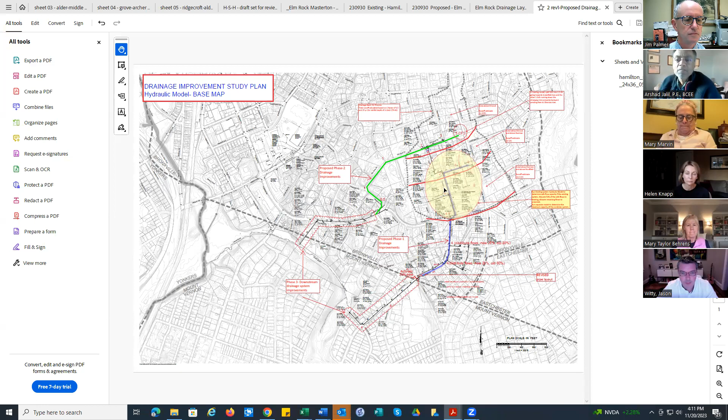This blue line kind of shows an improved conveyance system, a new catch basin, manhole, and storm pipe that we are proposing. This green line proposes another set of drainage pipe, as Jim indicated, improving the drainage system for the Elm Rock, and goes up and discharges it back into the Pondfield Road drainage system, which kind of goes back through Leggett Road or past Leggett Road into the brook right at this location.

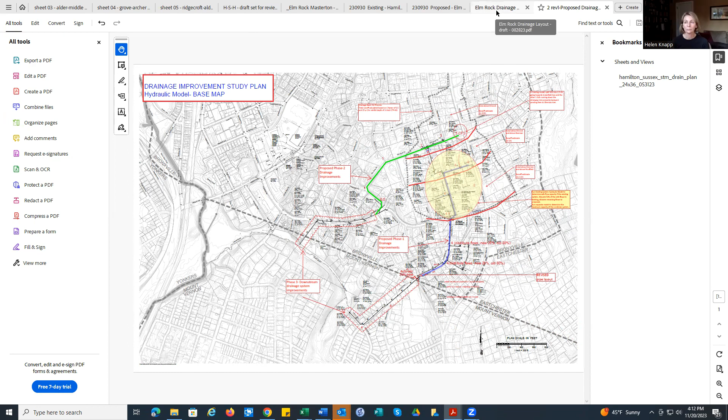There has been some hydraulic analysis. I'm just going to quickly recap what we had done in the past. This is the set of survey. We actually hired a surveyor to survey all these areas that you can look at. Later on, we actually hired a soil boring contractor to see the underground characteristics of the soil, the rock, the drainage, the water table, and all that. Just last week, we were able to get all that information. We have preliminary information, which is good enough for us to complete our projects to that 95% completion, as I said.

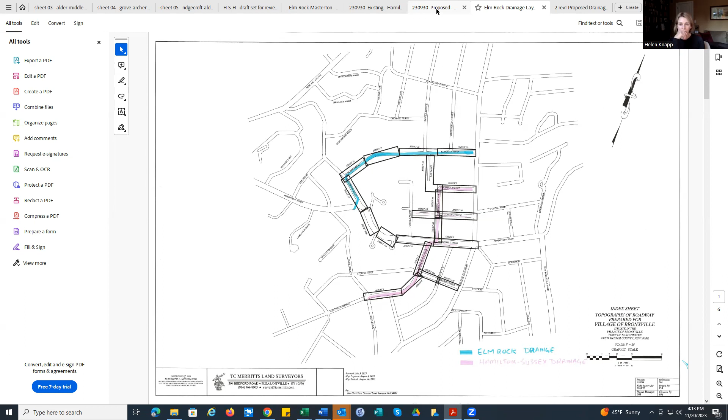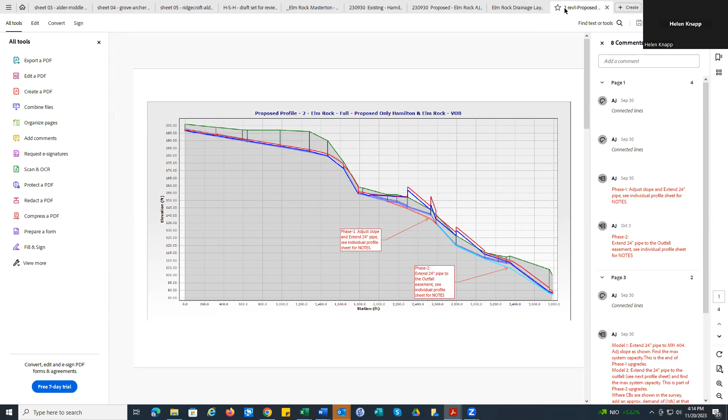There are some improvements that can be made. The lines are pretty flat. Some of the lines are back pitched as well. And those all will be improved as part of the final improvement of the project. Just want to quickly recap what the improvements look like. Now, this is the Elm Rock system that we are proposing, how the pipe's going to go. Again, sharing the old screen back again. This green line is our Elm Rock project, and this blue line is the improvement that we proposed for the Hamilton-Sussex.

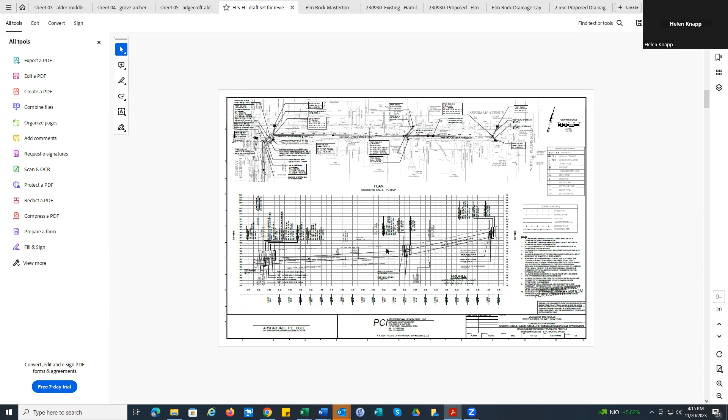So to date, I just want to show you the projects that have been completed. This is the complete design that you're looking at. Just quickly going through all these sheets to show you they have all pipes, profiles, and details completed to a degree that we have planned on this Wednesday to have our selected contractors, which have been selected for emergency repairs, available to walk the site, and we will be taking questions and give these guys a short period of time to bid on the project.

I'm also going to show you some of the other documents. This is practically a bid form that has been prepared for contractors to look at. All of the quantities of the system design have been completed. Once this has all been submitted, we expect that all of this information should be available, barring any detailed questions that cannot be answered right away, hopefully within one week's time after we do the walkthrough.

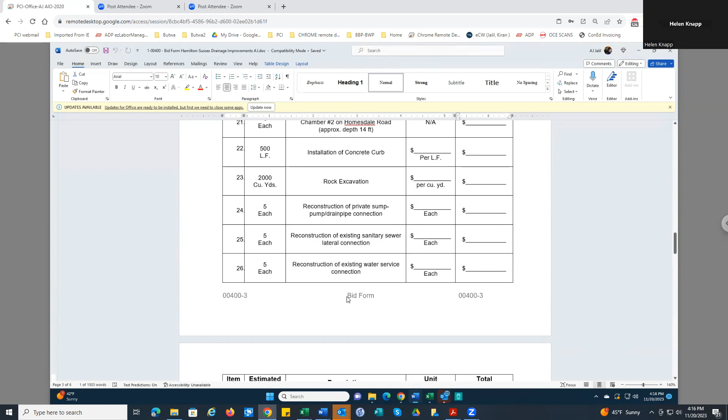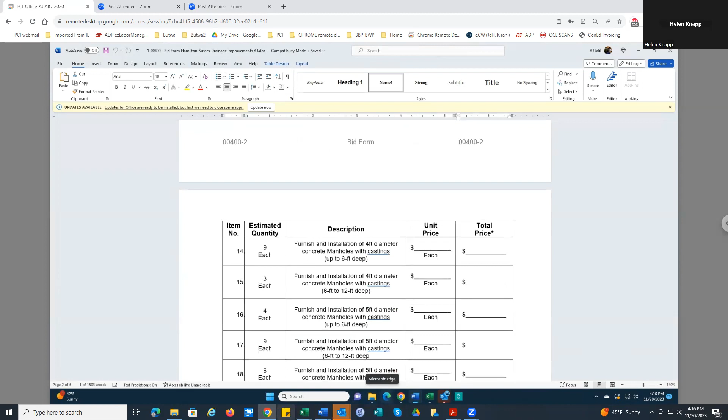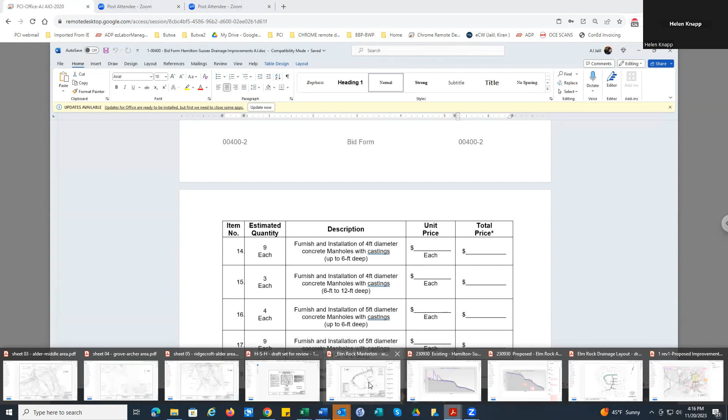So we review the project, we submit a recommendation for award to the village. And my understanding, Jim, you have already scheduled meetings to review the recommendation of award and efficiently look into awarding this project. Yes. So I just showed you a little glimpse of everything that has been completed. If you have any questions, you can ask me where we are with the project. I'll keep the screen on. This is an old layout of our hydraulic model system that we were working on.

So AJ, can you review the timeline now, if you don't mind? Sure, I can. I prepared a very tentative brief timeline schedule. This is fresh; I was just discussing it with you, Jim, earlier this morning. What I've done is put down some dates and some acronyms for the stepwise procedure.

We have a pre-bid walk, as I said, this Wednesday on the 22nd. After this walk is complete, in the week of the 27th, we're going to take all the questions from our contractors, respond to them, and hopefully by the week of December 4th, we expect them all to submit their cost proposals to us. Once the cost is submitted, we'll probably within a week's time review all the documents that are submitted and prepare our recommendation of award for the village and village board to review.

Village board, as Jim said, you probably have a week of the 18th, Jim, so that the village can review all those documents and our recommendation of award to receive a notice of award. Once a notice is provided to us, we'll immediately send the notice to proceed information to the selected contractor.

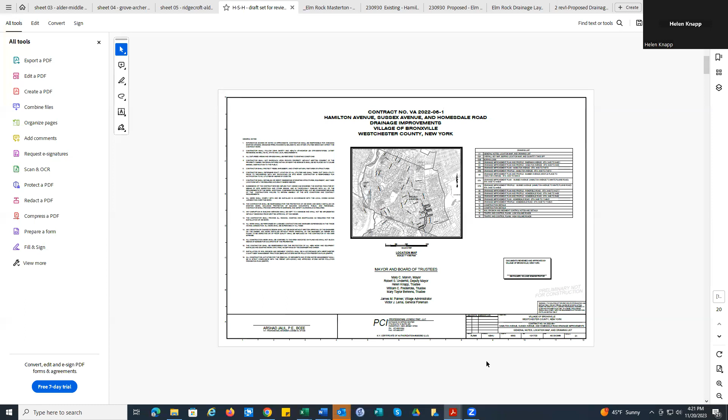We were unable to get the borings in our hand. I received the soil borings, the rock excavation, the water table, and all that just last week. This information has not been provided to the contractors yet. If I show you, you'll see what I'm talking about. This information is just populated, all the quantities and the rock probes, and these are the soil borings that were done. You guys, thank you for accommodating. There must have been a lot of noise in the past few weeks. That's when the rock excavation and borings were going on. So this is a conservative estimate from my end, but we'll see what contractors come back and tell us. And during the process, we're going to go through hurricane season again.

So is there any sort of disruption to the existing drainage system while we're doing the construction, or are they able to parallel track drains so that there's actually more capacity during? Sure. None of the existing system we intend to abandon or disturb. As a matter of fact, typically how construction works, you go from downslope to up, depending upon how the contractor takes it. They have challenged me and made me learn a few things in the past, but generally speaking, it normally starts from the bottom end, where it's easier to push the pipe as opposed to pull the pipe. That's the reason construction always starts from the bottom end. Most of the time that would enhance the project as the process goes on. So the answer to your question is yes, they will stay in place.

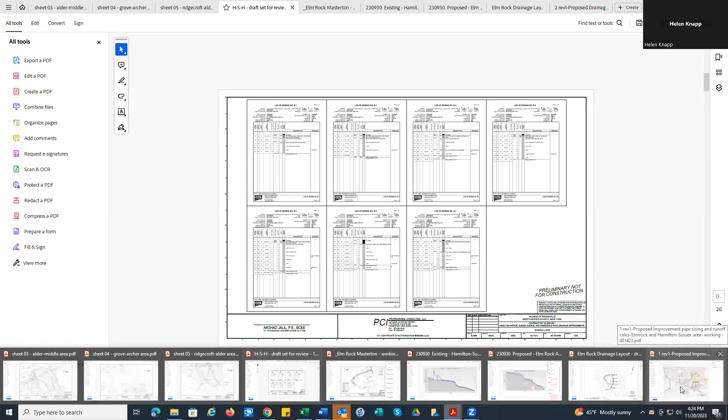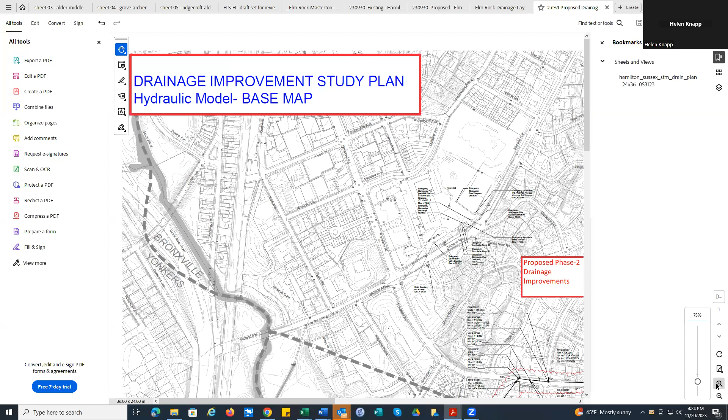Correct, AJ? Yeah. So I'm going to zoom in. I know it's very difficult to see. So it's all supplemental capacity. Yes.

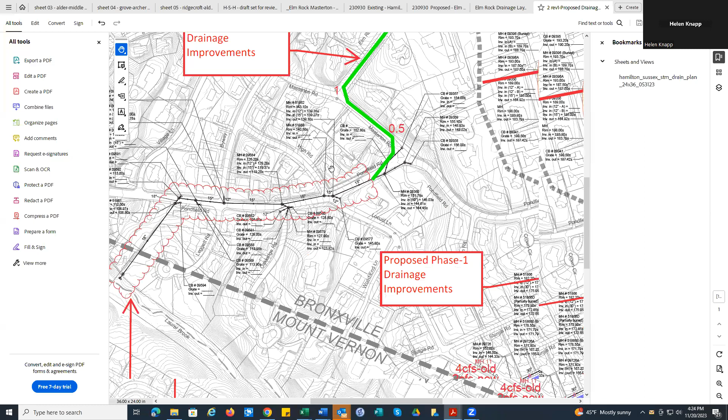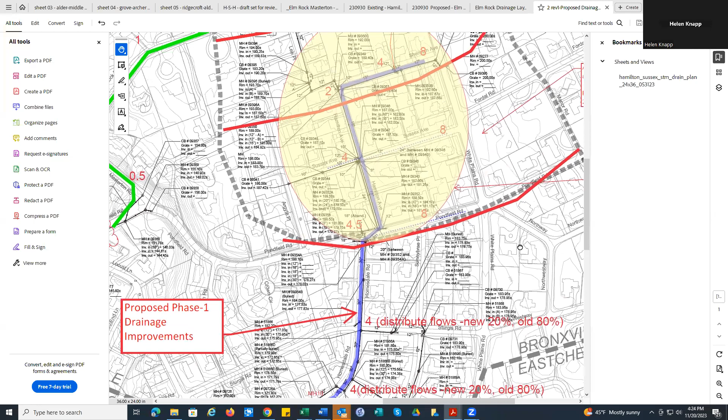I have a question. My name's Kristen Smith. Sorry, I'm driving my kid to something right now, so I'm in the car. But I live at 46 Elm Rock Road, between White Plains Road and Lee Place. And I just wanted to make sure I understand. I see drains on Elm Rock until like Oriole, so we have some kind of existing drainage there, but this would be an additional brand new drainage pipe. Is that correct on Elm Rock?

Yes, Kristen, I was just going to put that screen up so you can see it. I believe you live in one of these three houses. Yeah, I'm the second house on Elm Rock on the south side of the street. Okay, so that would be your house, I don't know if you can see my hands moving. I can't, I'm driving right now to the school, sorry. Okay, no problem. That's Kristen's house. So we located you.

So the system, just to answer without the aid of the drawings, yes, there are some catch basins. For everybody else looking at the screen, these are the catch basins Kristen was talking about on one street, and these are some of the catch basins present on Oriole Place. They both are connected together and drain into Lee Place, which goes back into the low-lying areas of Hamilton, Sussex, and Sherman, right?

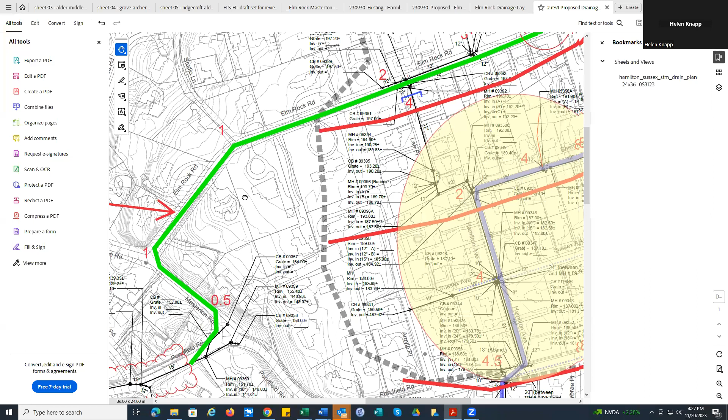Yes, that's helpful. And my second question: I wanted to make sure you're aware. I think I emailed you a week or two ago about how in my backyard, before I owned it, several private citizens got together, and there is this kind of drainage system in my backyard that drains out to Sherman. I've heard two different stories. One is that when Sherman gets backed up, some kind of flap comes down on our system and it becomes a contained system, which sounded too fancy to me to be possible.

But basically what happens to me is everything backs up, and my whole backyard becomes a pond. I think I sent you a video of my backyard. Right, I've seen your video. Go ahead, finish your thought first. Oh yeah, and I also get flooding in my basement. Luckily in Ida, I was home, and my husband and I were shop vacuuming until 2 a.m. So I probably didn't experience the awful levels of water that friends of mine on Sherman and Hamilton experienced.

But we do receive a lot of water in our basement as well in these events, and on September 29th, we had a lot of water in our basement. So I was just wondering if you're aware of that system, I think you are aware of it, and if you have any views on it, or if it'll just be alleviated by all these other solutions.

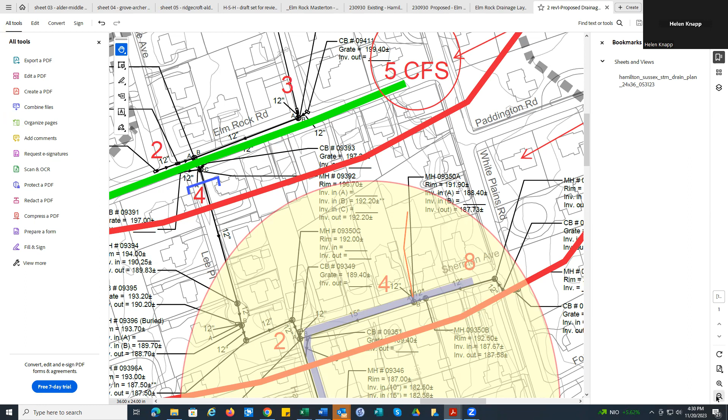But in answer to your question, yes, your understanding is correct. If I may zoom out, you'll see how I did the hydraulic analysis right here. For everybody who's looking at the map, this dotted line is the drainage basin, where every drop that falls from the sky collects to this area right out here.

And since I've bifurcated this into these red marking lines, 2, 3, all of the area that comes in from the top is going to be intercepted with this green line. So anything that used to naturally drain to the backyard of these people is going to be collected and pushed out. So Kristen, your backyard will be improved as far as my analysis is concerned.

The flood that used to come in from the northern streets back onto Elm Rock should be intercepted and pushed out more westward towards Elm Rock Road to another basin. And the new capacity on Sherman Avenue should also aid fast drainage of your backyard. The only thing I have to look at is the design aspect, the catch basins and the privately installed pipes, to see if they are in good shape.

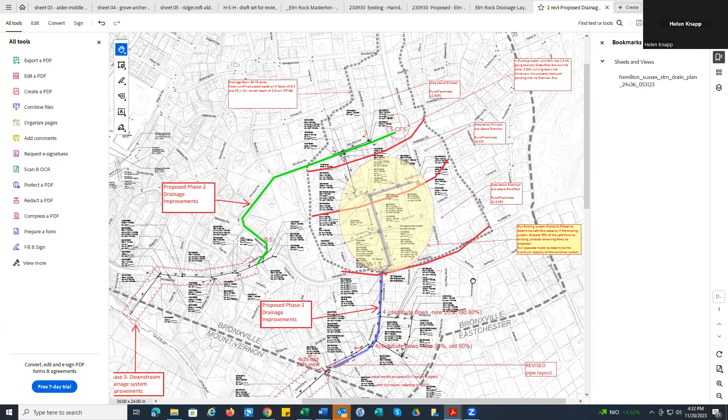So, AJ, can you explain what construction's going to happen on Homesdale as it crosses Pondfield and goes down to the catch basin in Mount Vernon? Yeah. I know at least one resident from Homesdale is on the video. I'm just going to put those sheets on so you can look at it. Just let me search for it. Just one second.

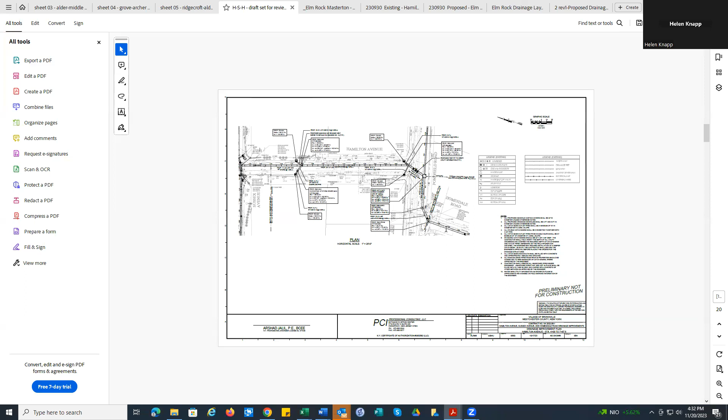All right, so you see this pipe coming in from Hamilton, this is Sherman right here. I'm sorry, Sussex right here. From Sussex, the new drain pipe goes parallel to the old pipes that are there, crosses Pondfield and goes down a little stretch of Pondfield before it continues downhill into Homesdale. So the next sheet, it's not Sussex, I'm sorry. Let me look at the streets.

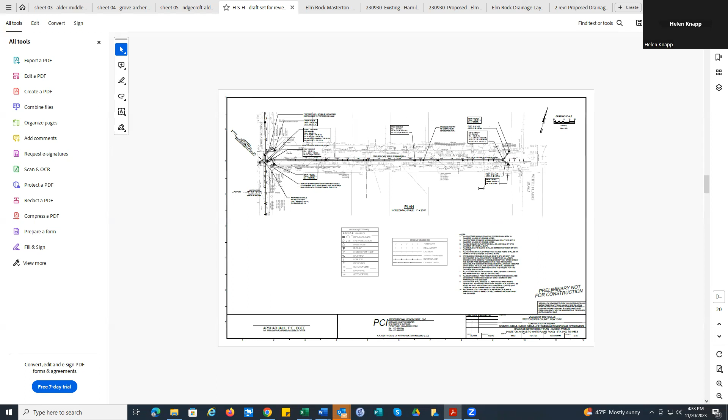That's Pondfield. Okay, so I'm going to zoom in. Yeah, that's Homesdale. I'm going to zoom in and see if I can pan it out better this way. So the pipe that currently runs in Homesdale is where my hand goes. It's in the grassy area off the road right here. And this new pipe will be installed in the confines of the road itself, and we will be on this side of the road, what I would call the eastern edge of the road.

And that's where this pipe is going to go. The size and the diameter of this pipe selected is not much different than the existing pipe. It's going to be a 36-inch diameter pipe. The depth of the pipe, as you can see, is pretty deep. The purpose of being deep is we are providing a positive slope to this so it can provide ample capacity to the system.

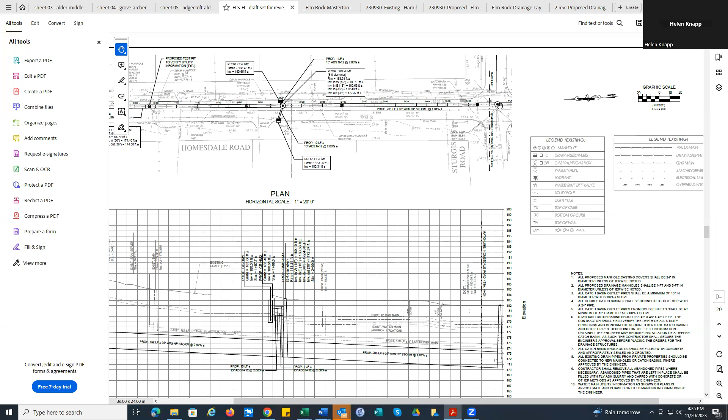As part of the improvements of Elm Rock itself, we will be adding 2 more collector catch basins to keep the streets more clean in that neighborhood, and that would drain specifically into the new pipe. This pipe is going to carry itself along the eastern edge of the road within the blacktop area, past Sturgis, where you're basically going to see nothing but a couple of manholes installed at each intersection of the road. Let me go to the next sheet.

I think we lost Sturgis right here. Right, that looked right, and then you had the next section there. Yeah, that's the one. And we have some big chambers where catch basins are being installed. We're also putting some flow control chambers just to make sure that we protect downstream people from excessive flooding.

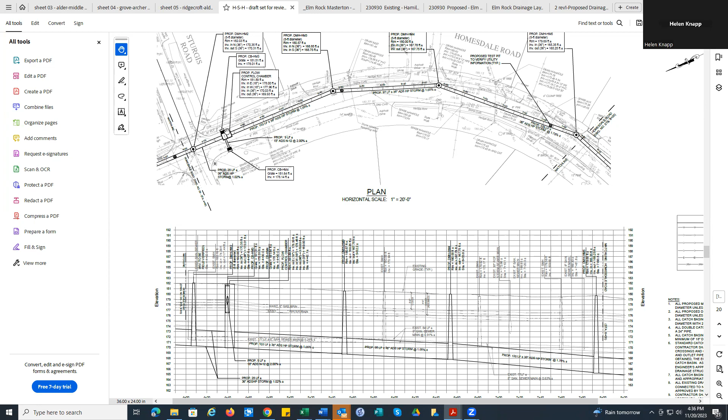There are some improvements in the downstream pipes required to provide the maximum capacity of relief that our system can provide to all the upstream residents. But until these downstream improvements take place, we are putting flow control chambers that will regulate the flows to levels that will prevent any kind of excessive flooding downstream. Again, don't get me wrong, the system that we're installing is going to improve our capacity in the pipe by upwards of 400%. So that's the quick answer.

And the pipe continues. Sorry, AJ, it will run continuous. It's going to be a new addition, not replacing the older pipe. No, and I was going to show you the older pipe, as I indicated earlier, is actually further east in the dirt on the other side of the curb line. It actually zigzagged the road, and notice this, from this point on, it turns itself right this way and starts carrying itself on the western side.

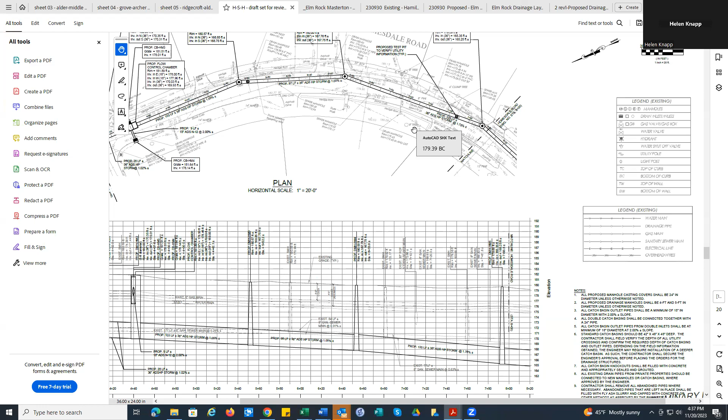And again, that carries itself into the grassy area underneath the trees, difficult to maintain, buried manhole. It was a challenge for us to even study that pipe right out here. So this pipe that we're putting in will be in the roadway, independent of the old. We're going to keep the capacity of the old alive because we want to maximize the drain capacity for our system. And as it continues, I'll show you where it ends.

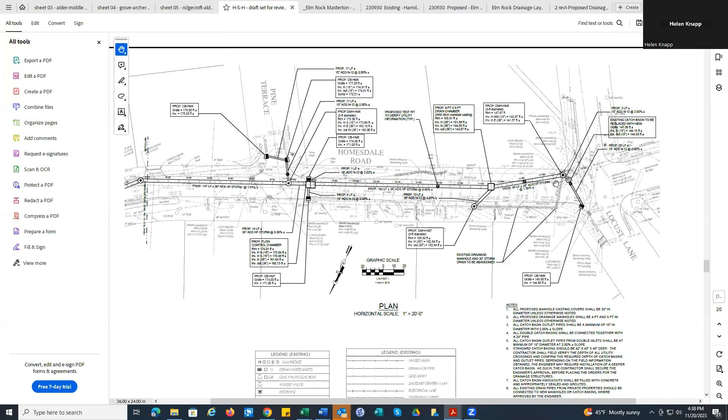As you can see, the pipe still continues along the eastern edge of the road, but within the right of way of the pavement, and then ultimately meets the catch basin that currently exists at the intersection of Locust and Homesdale. From that point on forward, it's the existing pipe. I've discussed those analyses with Jim in the earlier presentation; those pipes are not in bad shape. There are minor improvements needed, and that would be discussed at a later stage. Right, but they'll be able to contain the new capacity of the new pipe plus the old pipe. I've done my analysis, yes.

I don't know how well they maintain their pipe, and every system needs its own maintenance. There are some flat sections of the pipe which restrict the flow a little bit, and before it surcharges, that's one of the reasons why I have installed a flow restrictor. They're called flow control chambers. We do these kinds of designs in major cities where you have combined sewer overflows. These restrictors are great. You can choke the capacity of the pipe to the desired level to answer the needs of the downstream system. So we have the system to make sure that they will not be impacted aggressively.

AJ, during the project, are there any incremental benefits mid-project, or are all the benefits only when the project is fully completed? Well, these pipes will be connected. As I said, this is the downstream area you're looking at. The project really starts from the downstream system, because it's easier to do the construction when it starts from the downstream. I think the contractor is going to start that way.

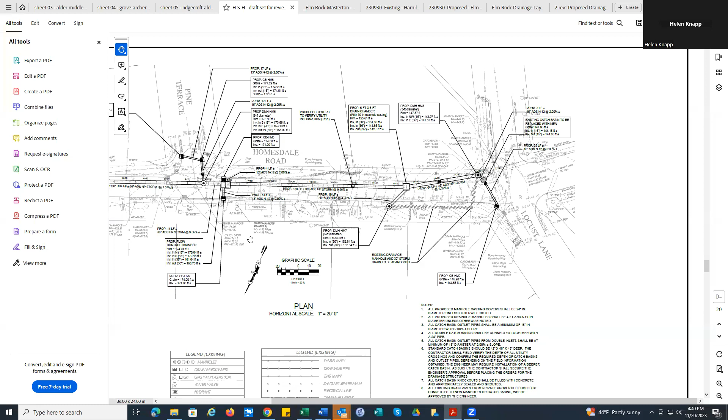And as you're improving the system, the good thing is, Mayor, that we don't have agencies to approve this thing and wait for all of that before we put it into service. We can basically test it and put it into service as it's being constructed. So whichever portion you've completed, like all these 25 catch basins, will be new. All of these improvements are going to assist the whole system. But the ultimate improvements you're going to see when the whole system is completed. And I'll show you that screen.

But there will be segmented improvements is what you're saying. Absolutely. Okay. It will be, as I said, the project's going to start, this is the overall improvement there. So as the project starts from here, say, for example, you only completed Homesdale and nothing else, then you will improve the entire system, and the flooding that goes into Sunnybray from Pondfield. We'll be adding pipes in Pondfield. We'll be adding pipes in Sussex. So as you're moving forward, you're going to be improving that portion of the downstream system. Okay. Thank you. Sure.

I have another question, if it's okay. It's Kristen Smith again. Does this project require Mount Vernon approval, or is this something that we do on our own, or is it dependent on other approval processes? Mount Vernon, in my understanding, I've submitted all these plans and prior discussions with Jim. Jim, you have been in contact, you can answer better, but they are aware that we are basically addressing the ills in our system. You're not creating more flood. You're not adding more pipes. You're basically improving the pipes that are there.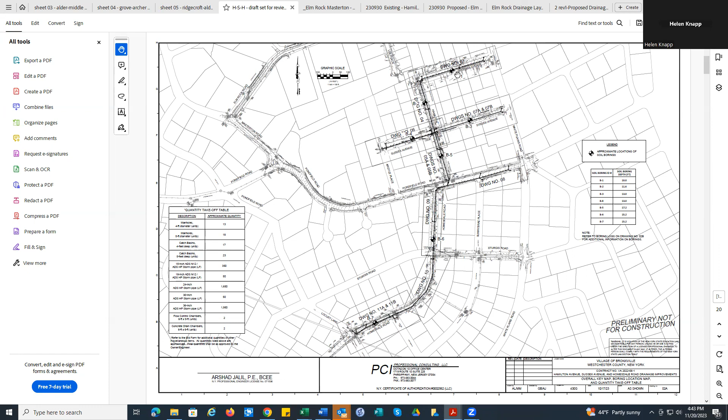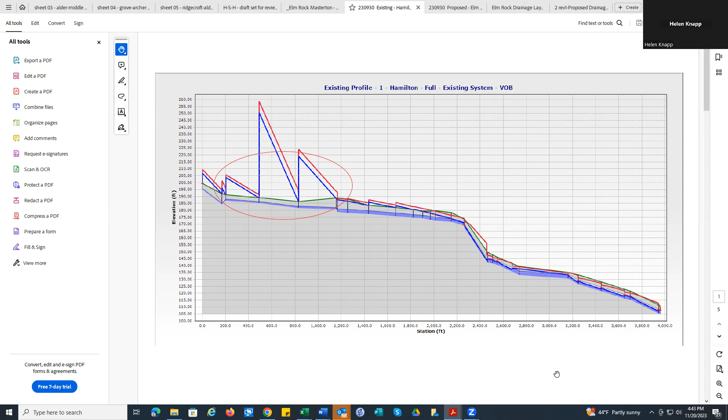Let me put up the hydraulic model that I did. When you look at the model right out here, are you able to see this model on the screen? Yes, yeah. So you could see this all goes up, and it doesn't surcharge anything right out here. We're just adding bigger sloping lines right here, just to make sure the capacity increases. So we're not improving the land. We're not creating any new floods. We're just trying to provide a better conveyance of the existing flood that actually happens.

To answer your question, I haven't done the coordination. I've submitted all my documentation to Jim, your office, and I've seen some emails that you have coordinated with Mount Vernon. I don't know how far you've done this coordination, and do we need to sit down with them again? I know we're dealing on the other projects with Eastchester on a regular basis. I'm not sure if Mount Vernon has received the final plans.

Yeah, not this final design now, but of course, and you've been at some of those meetings that we've met with Mount Vernon out on Locust, where we share that border, and expressed to Mount Vernon that yes, long term, I think everyone can benefit by them making certain improvements down Central Parkway. And more importantly, through Hunts Woods, where all this water and much of that section of Fleetwood in Mount Vernon drains to. So, and you and I have talked about that.

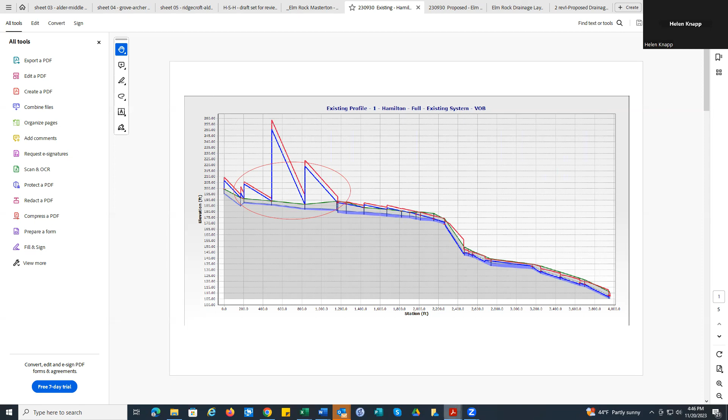Do we have other questions for AJ from the residents? Yeah. All right, like I said, I'll make the recording available for everyone, and AJ, I think I'll put that project schedule slide also out there, since everyone's going to be anxious for that, and I think it's largely in keeping with what we've been expressing to everyone along the Hamilton and Sussex area. We recognize the urgent nature of it. So, unfortunately, yeah.

We're walking the project with all the contractors this Wednesday, just the day before Thanksgiving. We're lucky that all the contractors are available and they agreed to meet with us. So I'll have better answers on schedule, on cost and everything as soon as I get a response back. We're giving these guys not more than a week to give us all their questions. AJ, you'll be walking both lines? You're not just walking Hamilton-Sussex? Yes, we're walking both projects, all the way to the end. Elm Rock to Masterton, and Sherman, Sussex, Hamilton, Homesdale, everything.

Right, and to that point, for some of the others that were not in the previous discussions, the village is quite familiar and has already vetted the quality work of these contractors, and we're going to be piggybacking, if you will, on an emergency contract that the board had awarded last year to these contractors. So AJ's already advised them of the work, that you've already walked with them to a certain extent. They know the urgent nature of it. The board has already vetted the quality of their work. But now they're going to be bidding on these specific plans, and they'll have specific quantities to calculate their expenses on. So AJ, how did you look at costs when you were creating this final plan? So good question.

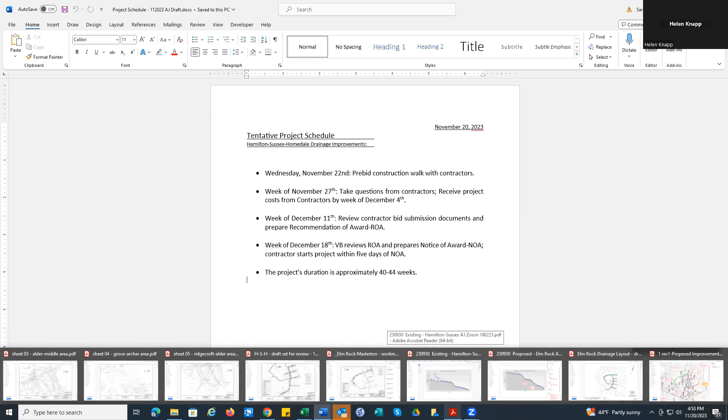So there's going to be nothing but a manhole as you're looking at it right here, and there's going to be a dividing wall in between. The wall will have a small opening right there on the top, so if a surcharge comes in, it can just go through the openings. But essentially, there's going to be a stainless steel aluminum plate right here, guided into the 2 channels, which has different holes. You're looking at the plate elevation right here. This is the plate cross section.

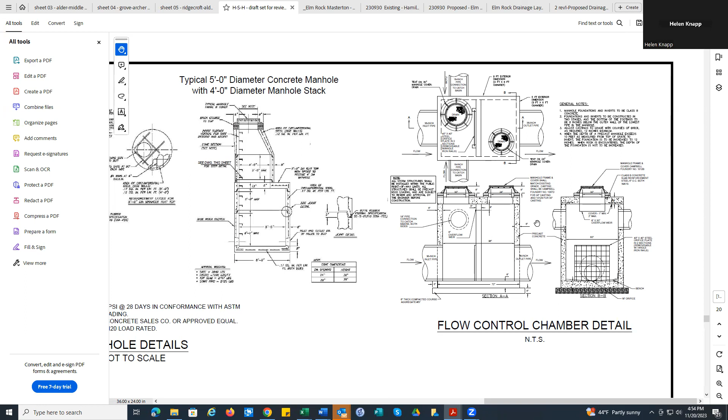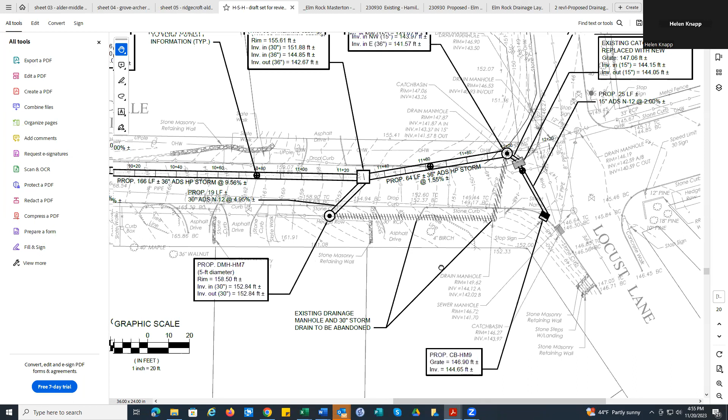So you basically can slide in as much as you want to restrict the flow. And if you restrict it too much, the flow doesn't stop, obviously. So it will go out from these pipes. I'll show you one of the pictures. That's the chamber right there. So you go out from these 2 side pipes and have a sheet flow right to the street, as it normally sheet flows in the street, but the flood would be confined in the street between the curbs.

And we selected these locations where the street drains itself much faster, as you can see from these contours. So at that point, everything is sheet flowing anyway. So this pretty much gives you insurance and protection. If the downstream improvements take a longer time, you can change those plates. It's nothing but choking the system, but designing it so it doesn't impact the overall design of the project, and gives us the ability to design the maximum capacity for the system, so we don't have to go back and design it differently.

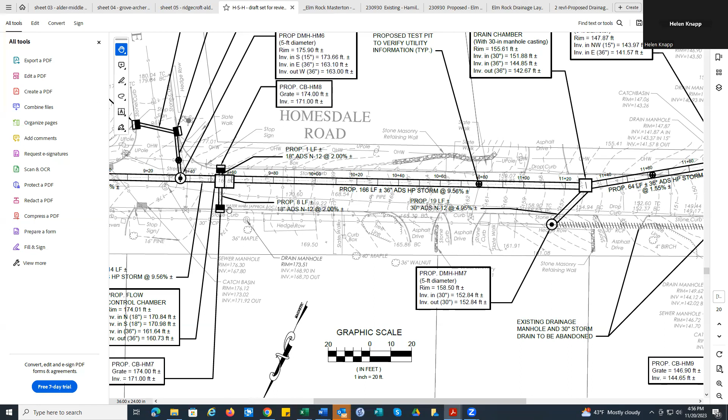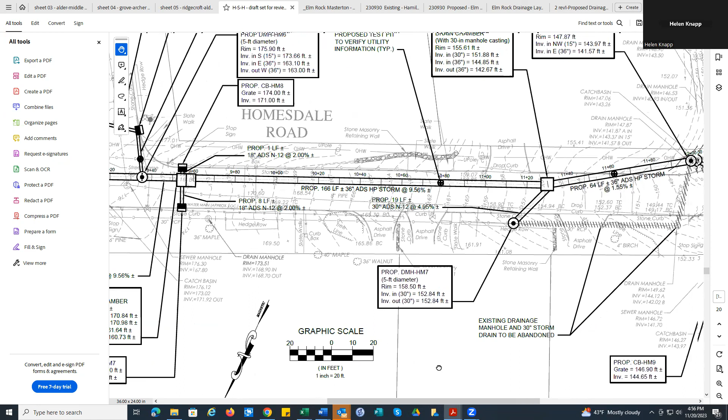No, that's clever. Thanks, AJ. You sure? And pretty much that's it. We're just hoping that these contractors are ready and excited and give us a very quick answer after this Wednesday.